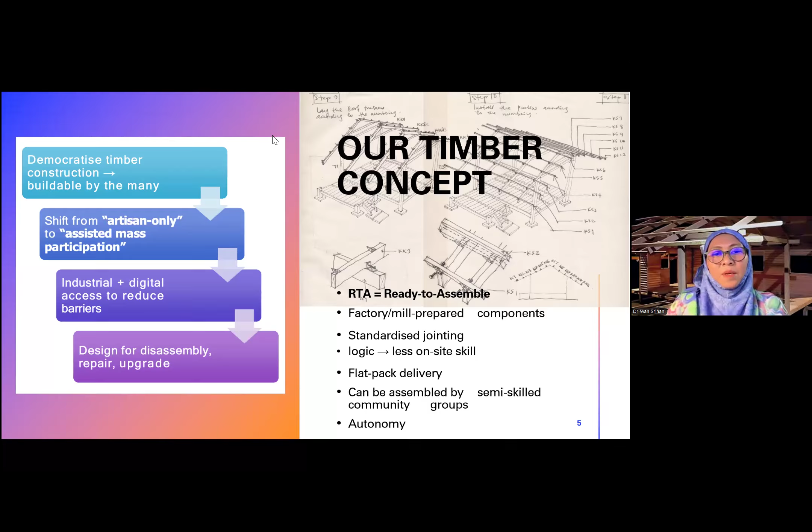We told them we are looking at this as a whole solution, starting from sustainable forestry, the wood processing industry, and all aspects—this should encompass the entire timber industry supply chain.

What we harvest from the forest, we bring to the nearest processing and manufacturing area—the factory should be nearby—to produce our own brand. At that time we were working with the state government of Pahang to give them a timber house as a brand, but as usual there are many red tapes and barriers to reach there; the bureaucracy, especially around timber, is significant.

We discussed all these ideas with the Japanese delegates, which led to a discussion showing they were looking into similar concepts, but on their side it's much more advanced—they were calculating LCA, life cycle analysis, which adds more value to the products they are selling.

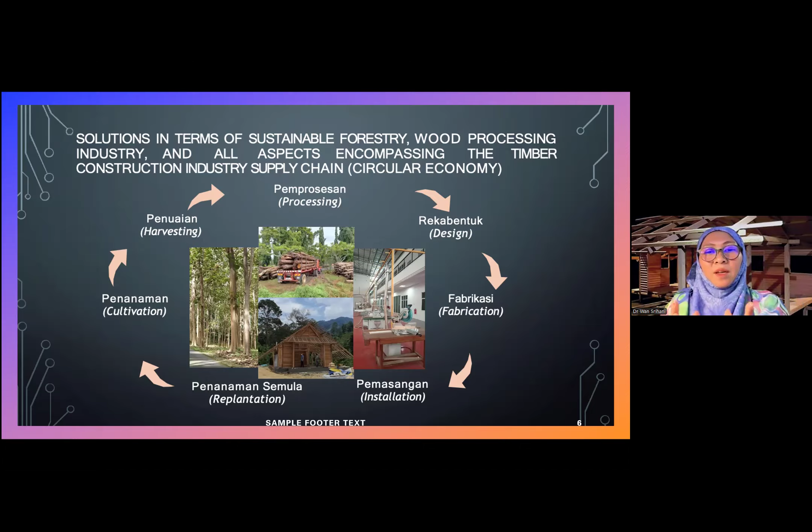After this slide, I will pass to Dr. Nurin, because this is where she'll explain what happened during the visit in Japan. Dr. Nurin, you have the screen now.

Can you guys hear me? Yes, okay. At first we expected to learn mainly about timber buildings. However, the most important lesson was not found in one building—it was found in the connections: of research institutions, forests, factories, engineers, designers, craftsmen, and also markets.

Japan's timber industry does not operate in isolated silos. Forest management supports sustainable harvesting, and timber certifications support confidence and traceability. Research institutions test the materials and structural systems, and architects translate these capabilities into buildings—each stage supports the next, which informs manufacturing.

This integration is part of Japan's most important competitive advantage. Japan's strength is not simply that it possesses advanced machines, good forests, or talented architects—the strength lies in connecting these elements into a coherent ecosystem. This leads us to an important reflection: Malaysia may not lack knowledge or resources; what we may lack is stronger integration between the knowledge and the resources we already possess.

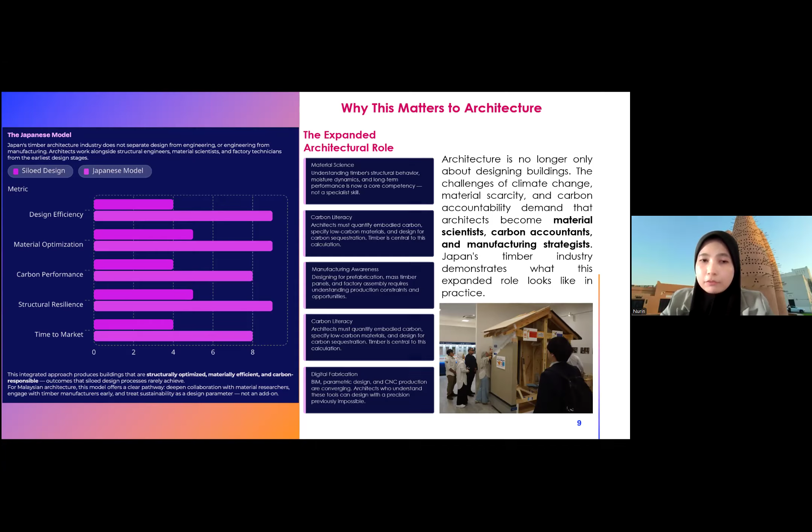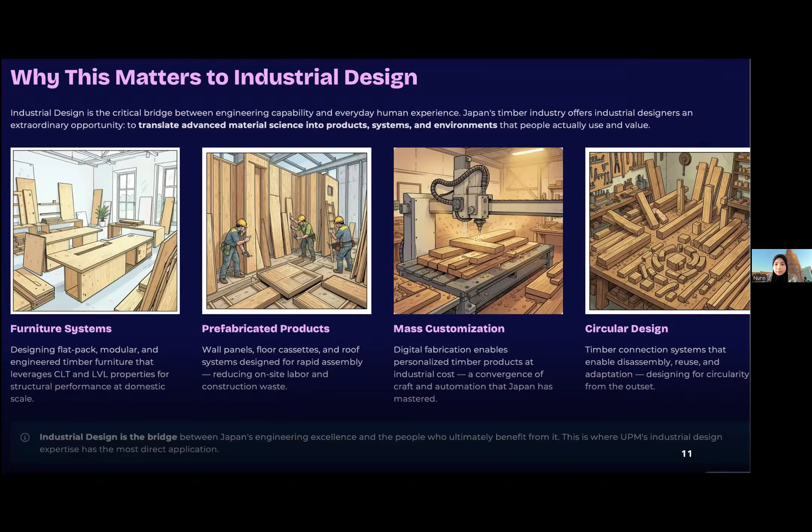From another point of view, why does this matter to industrial design? We can see that industrial design is another essential part of this ecosystem, because not every innovation needs to become a major building.

Innovation may also occur through furniture, modular components, construction joints, and then prefabricated products and digitally fabricated systems. Industrial designers will help to transform raw material into products that can be manufactured consistently, transported efficiently, assembled easily, and repaired when necessary. So this is where digital fabrication also creates opportunities for mass customization.

Circular design is particularly relevant, rather than designing products that are permanently bonded and discarded when one component fails. Designers can help to develop systems with reversible joints and replaceable parts.

This is where a research idea can become a prototype, and then the prototype can become a tested product, and it can eventually enter the wider industry and community use.

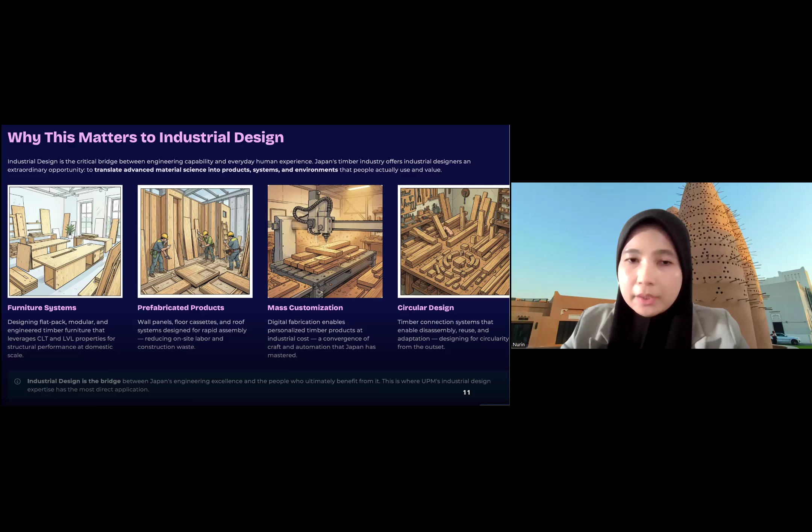The Japan secret is the entire value chain. If we had to summarize Japan's timber innovation in one sentence, it would be this: Japan's secret is not a single product. It is the strength of the entire value chain.

The process begins with forest management, continues with responsible harvesting, and then research institutions test the material and its potential applications. Next, engineers transform the research into structural systems where factories manufacture the components under controlled conditions. Then product developers transform these components into tested and certified systems. Finally, architects and contractors apply them in the real world.

But this is not simply a straight line from the forest to the buildings. It is a feedback loop. The performance of completed buildings will inform future research, and manufacturing limitations influence architectural design. So when one part of the system improves, the entire value chain becomes stronger.

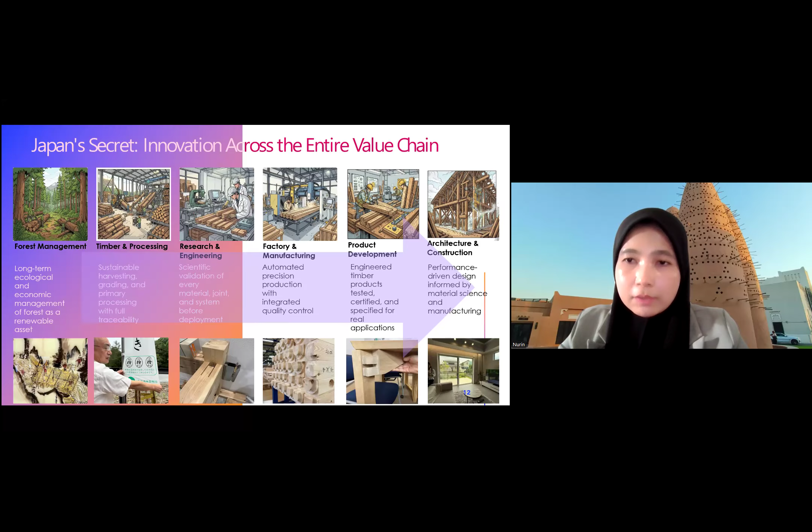This is what Malaysia should study carefully, where the objective is not merely to produce one impressive timber building, but to establish a system that will allow many high quality timber buildings and products to be developed consistently. So we look at what Malaysia already has.

At this point, it is better for us to ask where does Malaysia stand, where it is easy to assume that Malaysia must begin from the beginning. But the thing is, Malaysia already possesses many of the essential ingredients.

We have significant forest resources, and we also have established sustainable forest management practices. We have access to diverse tropical timber species with valuable structural systems. We also have the Malaysian Timber Certification Scheme, which provides an important foundation for responsible sourcing, and we have international recognition and market confidence.

On top of that, we also have strong universities and research institutions. At UPM and other Malaysian institutions, expertise already exists in forestry, architecture, engineering, and material science. So therefore, the main problem is not necessarily the absence of knowledge.

It is the fragmentation of the knowledge. Research may remain within a university without reaching industry.

So the question to ponder is, instead of does Malaysia have the capacity, the more useful question is how can we connect our existing capacity more effectively? We need stronger coordination, translation, and collaboration.

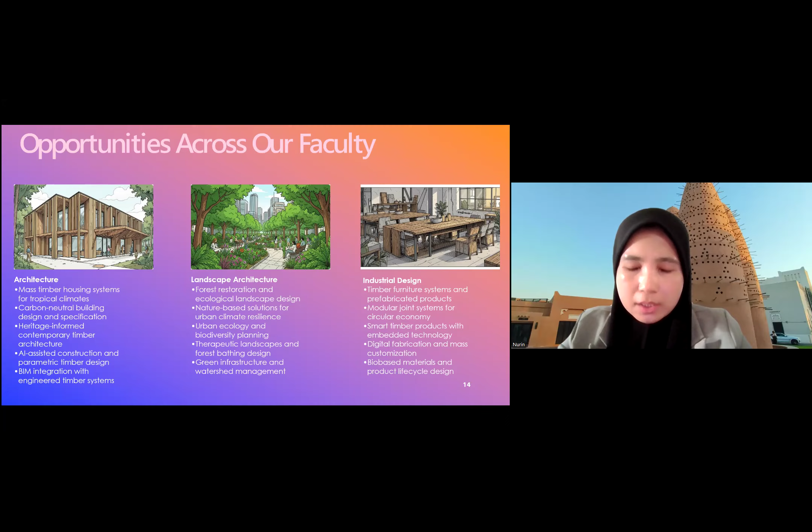This is what interdisciplinary design should mean. It is not simply placing several disciplines beside one another. It should actually allow each discipline to influence the problem from the beginning.

We also have an opportunity to visit Port Plus Obayashi Yokohama Training Center in Yokohama. This is actually a training center. It is natural to focus on the completed architecture, where we see its height, its structure, its facade, and its expressive timber expressions.

But this building is only the visible outcome. Behind it are actually decades of less visible works like forest management, material research, structural testing, factory investment, and also skilled craftsmanship. So this is why Japan has demonstrated that timber is not merely a traditional material.

Another significant statement we can learn from here is that timber is a future material. But also, Malaysia should not simply copy these Japanese buildings or technologies. Malaysia can learn from the Japanese system, where they developed in response to the Japanese forest, species, industries, regulations, labor conditions, climate, and seismic risk.

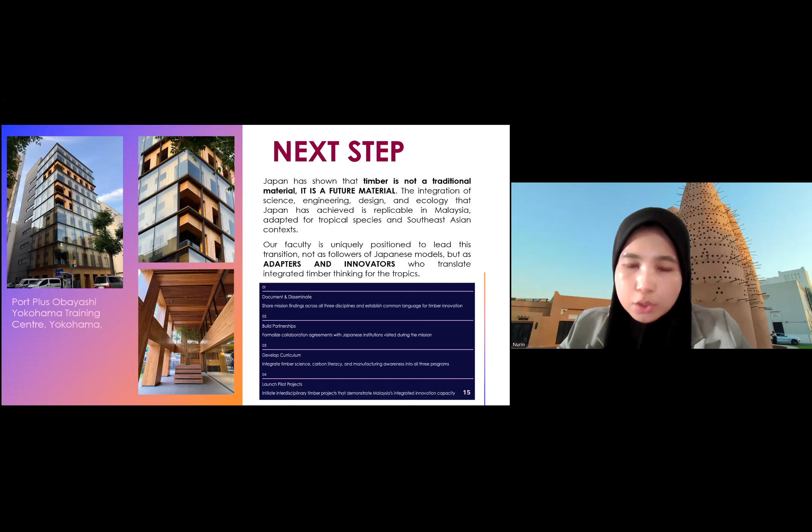Malaysia, on the other hand, faces different conditions because we have to respond to our tropical humidity, heavy rainfall, termites, local construction skills, and also our lifestyles. So our role is therefore not to become followers of this model, but to become adapters and innovators. So the next step is not imitation. The next step is translation - to translate the integrated timber thinking into solutions appropriate for the tropics.

So I think maybe Dr. Wan can explain this part for the international opportunities.

Yeah, this was approached to me by Prof. Hisham of engineering. For everybody's benefit to understand his background, he did his bachelor, master, and PhD in Japan. Hence, he is very much well versed in the language as well as the writing. His PhD thesis is actually written in Japanese.

So he always has this, every year a group of students from Shinshu University coming in as exchange students, mobility students. One of the students, earlier this year, was an architecture student. And so this girl, Nana, was given to me - it sounds like I got a gift, but I was given the responsibility to give her an assignment, a brief.

So I did a short assignment here. This is like the first page out of 3 pages on understanding the differences between our traditional architecture in Malaysia and the traditional architecture in Japan.

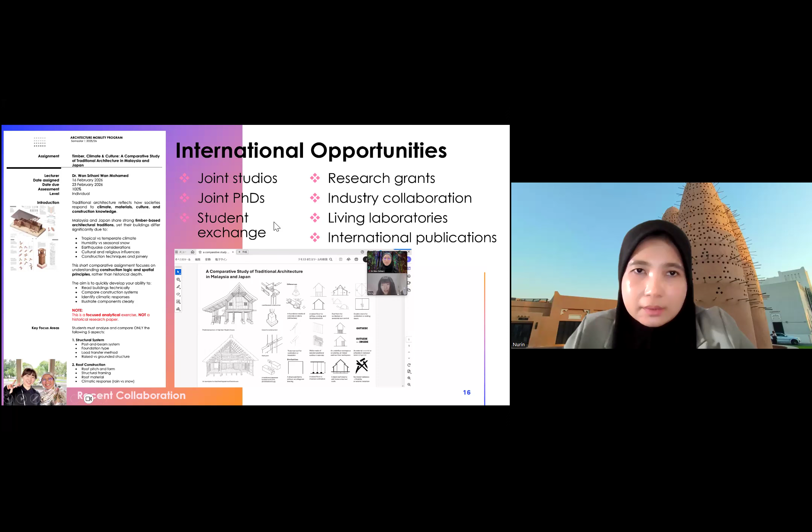Right, okay, that's one about our potential university flagship projects. Okay, sorry, before that, a summary of our faculty opportunities.

It is to establish a shared research platform where these 3 disciplines can work collectively towards a larger timber innovation agenda. Another thing we want to highlight is the potential university flagship projects. Based on these opportunities, we propose several potential flagship projects. The first one is Malaysia Mass Timber Housing, which could explore affordable, low carbon, prefabricated housing systems designed specifically for tropical environments.

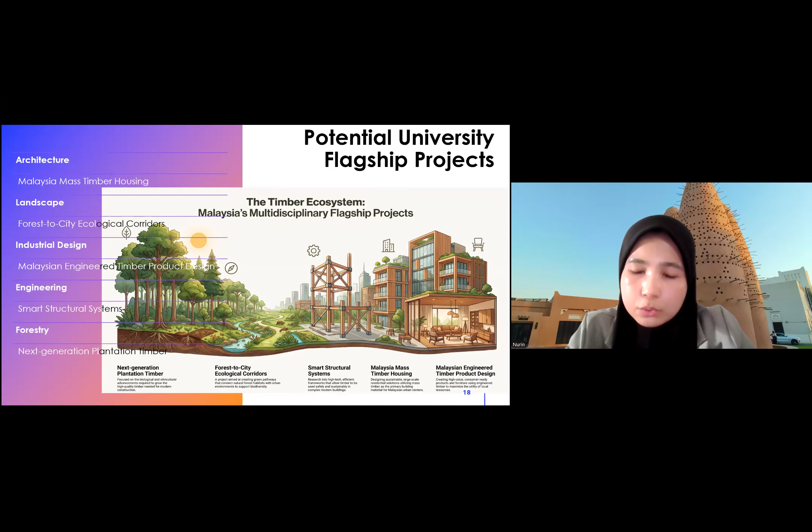So these projects should not operate independently. Maybe they can form a larger initiative, a Malaysian timber ecosystem led by UPM. Such an ecosystem could connect design, engineering, forestry, industry, certification, and community participation. It could also position UPM as a regional center for tropical timber innovation, not by repeating models developed elsewhere, but producing knowledge that other tropical countries may eventually learn from.

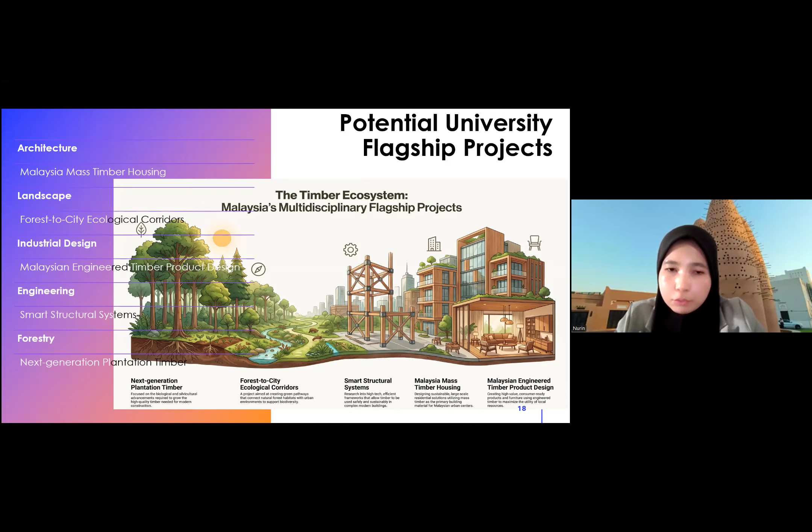From the beginning, we always ask what we see when we look at a timber building. After this journey, perhaps we can now see much more. We can see the forest that must be managed responsibly. We see the researcher who tests the materials.

We see the engineers who validate its performance. We see the factories that transform precision into possibility. We see the architects and designers who connect technology with human needs. Last, we see the communities who ultimately give meaning to the buildings.

This ecosystem is actually created across multiple collaborations. Our responsibility is to connect these strengths and adapt the knowledge to tropical conditions. So the future of architecture therefore extends far beyond its buildings.